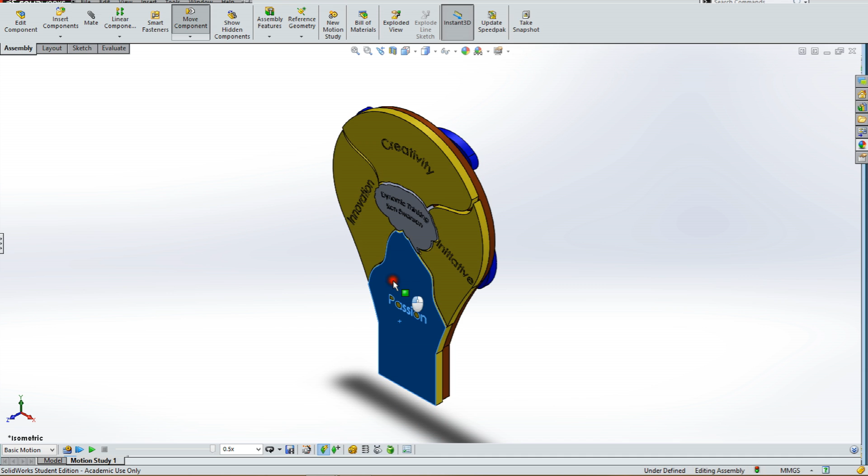But I had never seen anything done like this before, and I didn't even research it. For them all to come out from the center and move back into the center at the same time, it would require a different kind of mechanism.

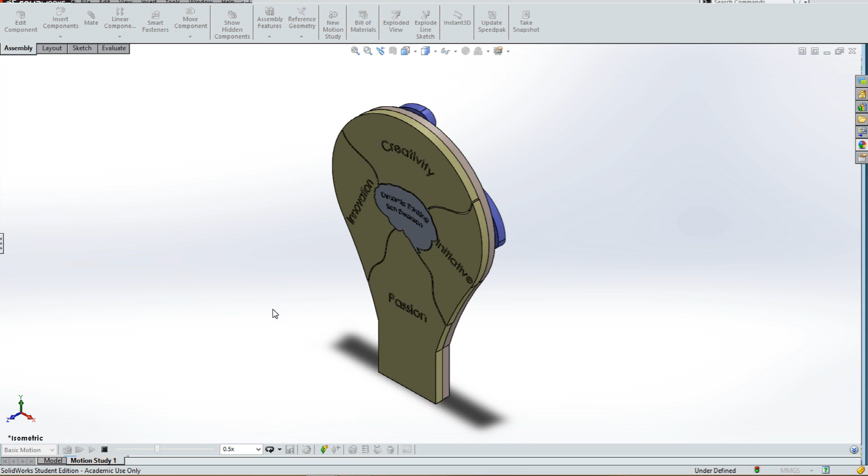So this is the effect that I achieved in the end, and it was because of this cam here at the back. It's a cam that works in two ways. Usually we have cams that work in one way, where they just push out like it is doing here. This one also pulls it back in, so it pushes out with this side here, and then it pulls it back in with this side.

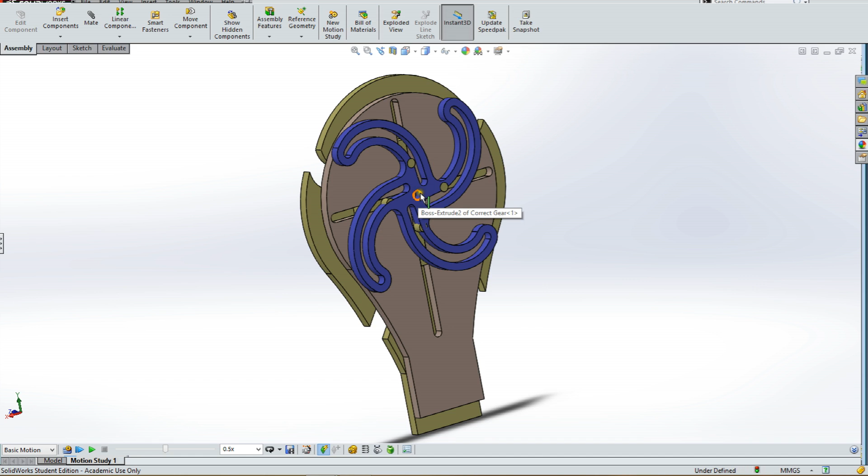Obviously the cam has to be able to rotate in both ways, so I'll have to use a genie board to make the motor rotate clockwise and then anti-clockwise to both push out and pull back in the cam.

I made it the very same way you can make any other cam. I just simply made out a displacement diagram like this here.

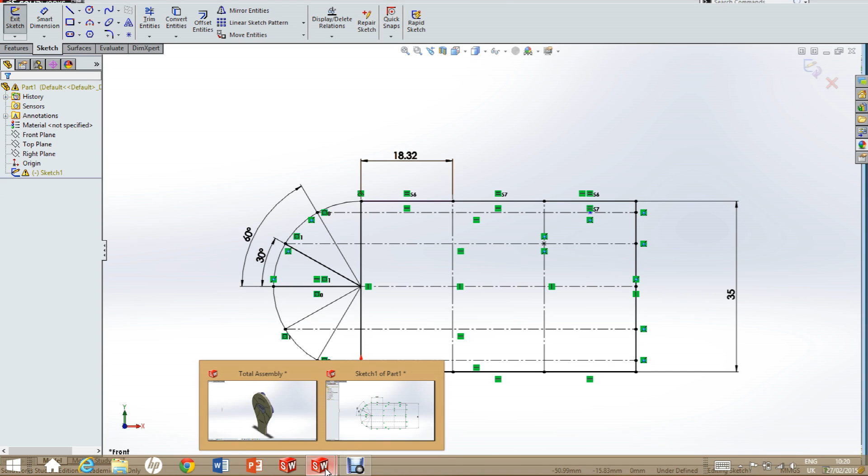The reason I have only 3 sections is because I'm only using 1/4 of the cam, I'm only designing 1/4 of it. All these, each part here is exactly the same, and they all represent 90 degrees of rotation. That's 1/4 of the cam taken up by each part.

So I don't need to do a displacement diagram out for each one. The same measurements are going to apply every 90 degrees, so it just saves time and effort.

So what I did was I calculated the amount that I wanted to displace these pieces, whatever amount I wanted these to come out and then back in.

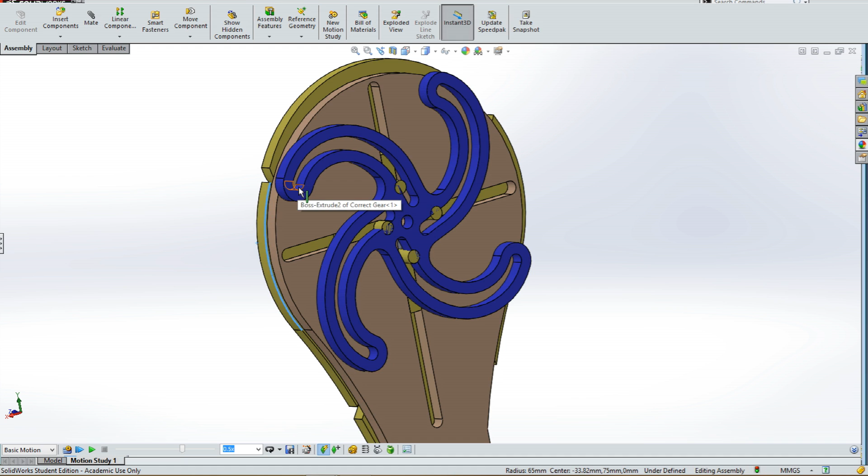And that's also equal to the distance from the center of this to the center out here. That's the displacement of the cam, how much it can push out the follower, which is these cylindrical pieces here that are attached to my front face pieces. How much it can displace them, push them out, and how much it can bring them back in.

That's going to be the height of my displacement diagram, not the distance from the center out here or the center to here. It's going to be the amount that I want to displace it, because that's the part of the cam that I'm designing. I'm not designing in here.

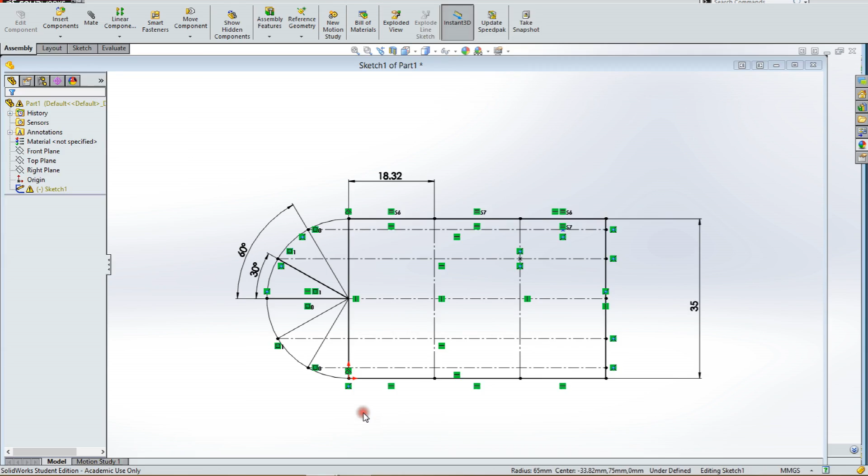So what I want to design is from here out to here. So what I did was I made a displacement diagram. This displacement diagram obviously represents 90 degrees, as I said, and I'm going to use simple harmonic motion, so you have to get your circle divided up into 6.

And then you're also going to have to divide whatever amount you want up into 6 as well, to get the points for your spline.

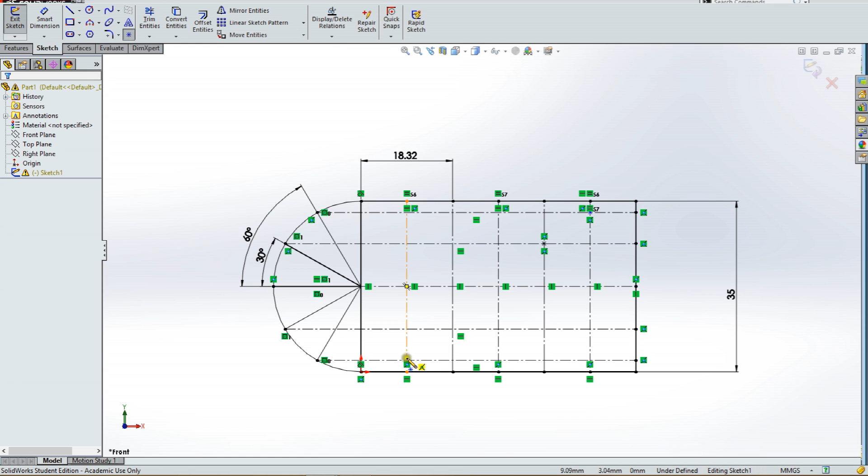Now, so all those are fully defined, which is important. Now I'm going to put a point on each intersection of the lines here. There's already one there, and there's already one almost up there. So I'll just fully define them as well.

This is so the spline can have defined points in which to pass through, or else it won't be defined in the end. Okay, so now I draw the spline.

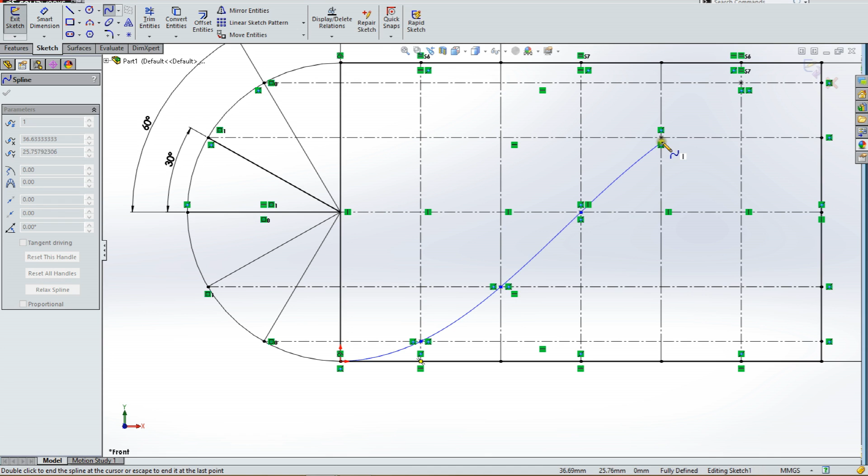It's the same as any other displacement diagram that you might do when you're even on a drawing sheet. It's just that we want to get accurate measurements for our cam. You could even do it on a drawing sheet and then get the measurements, this is just a lot simpler and a lot more accurate. You're sure it's going to be right.

Okay, so that's our spline there, that's our displacement diagram. If you were to do it again and again and again, it'd just be the same, so that's why I just concentrate on the one section.

Each of these lines, every second line here that I showed at the start, is 30 degrees. So that's 30, 60 and 90, which is a quarter of the cam that I want to design.

Now the next part is going to make the sketch go a bit mad, but I don't want to get any resultant part from it, so it doesn't matter. What I want to get from this is the measurements, at which this point here is far away from the inner point. So this line here represents...

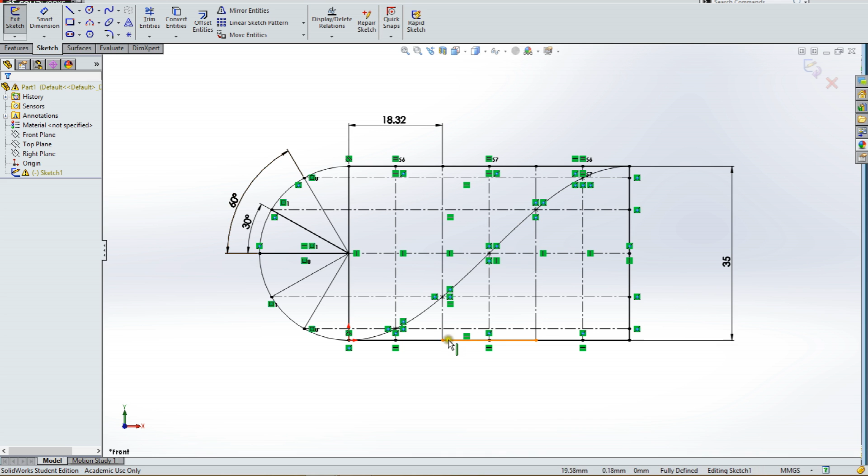...the center of this here, and the top line in my displacement diagram represents this, because that's the maximum diameter, or the maximum radius, and this is the minimum radius. What I want is the displacement, 35, so that's what I did here. I did the maximum radius, take the minimum radius, and that's it there.

So what I want are the measurements from the minimum radius. That's 2.34. As I said, the sketch is going to go a bit mad, but it doesn't matter because I just want to get the actual measurements from these points that the spline passes through.

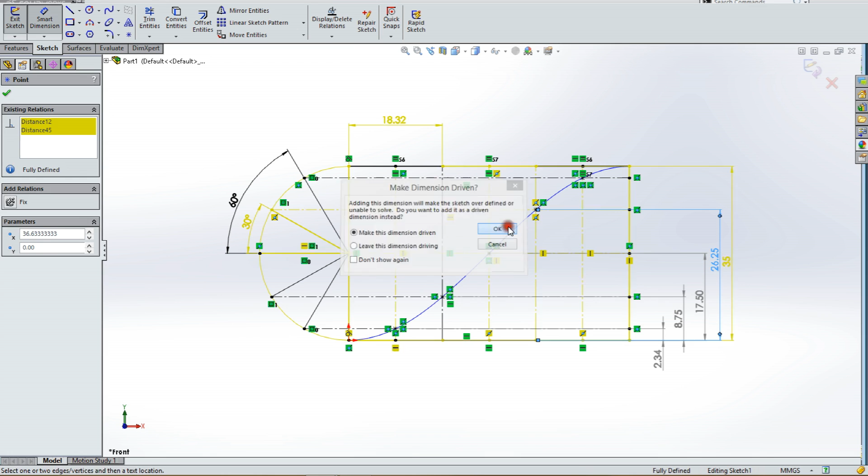If these lines, every second line here, represent 30 degrees, 60, then 90, these must represent 15, 45 and 75. So that's what I'm going to make in my next part.

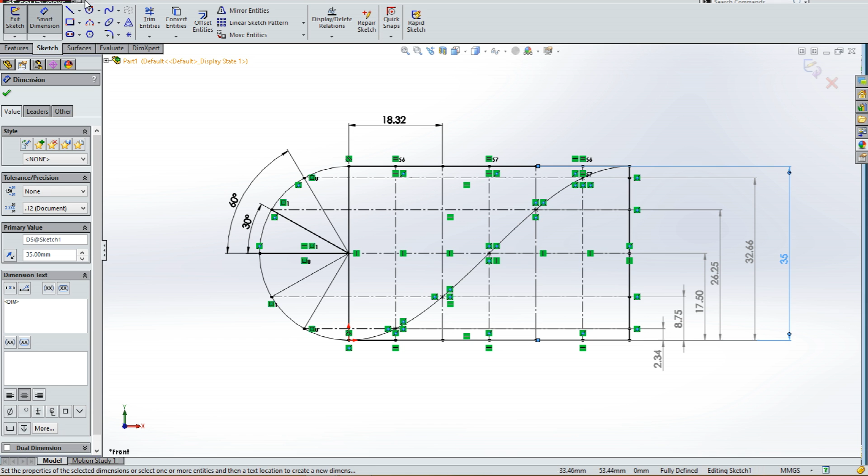I'll just make a part now of how to make the actual cam, given that we've found out the dimensions.

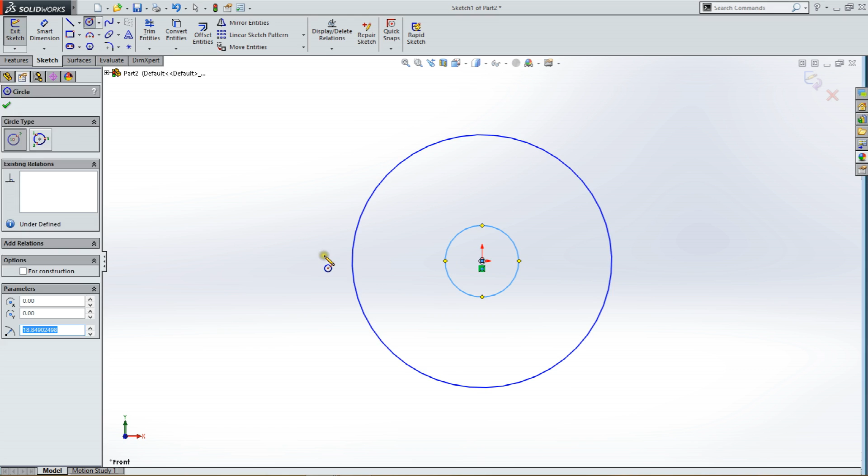Okay, so we'll sketch on our front plane there. We'll sketch two circles. Now we'll put a point here and there. I'll make this 35, so that's going to be the displacement diagram basically.

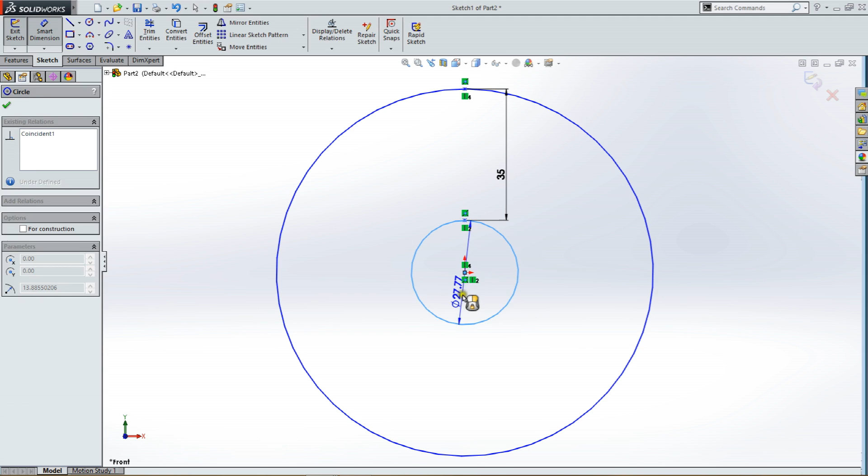Now I want the center of the cam to be, say, diameter 20, just for a bit of strength. So that's fully defined now.

So that's diameter 20. Now I want to split up a quarter of my cam into 0 degrees, 15 degrees, 30 degrees, 45 and so on. So I'll just draw these lines here.

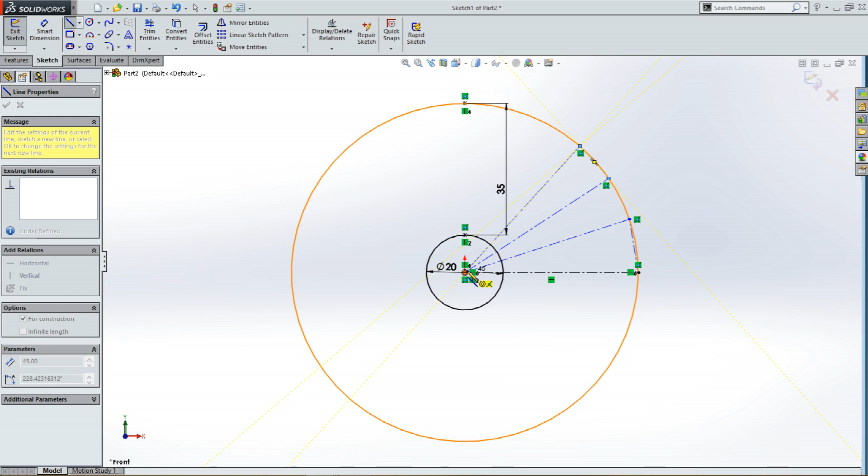30, 45, 60, 75 and then 90. Okay, delete these little ones in between.

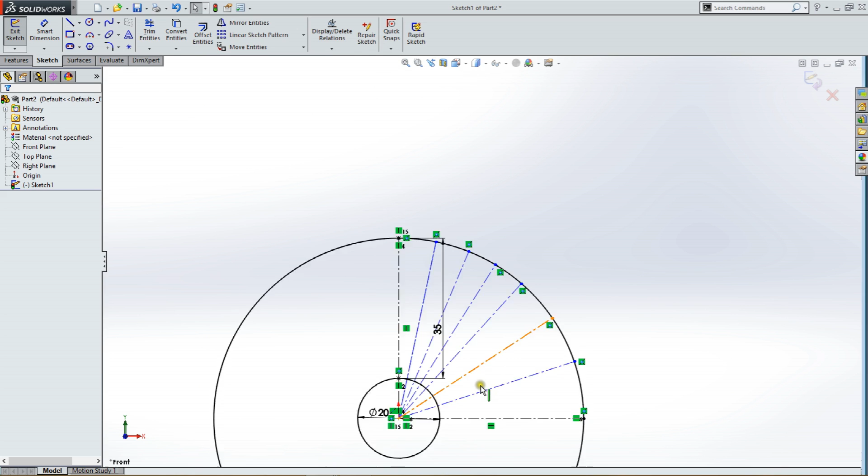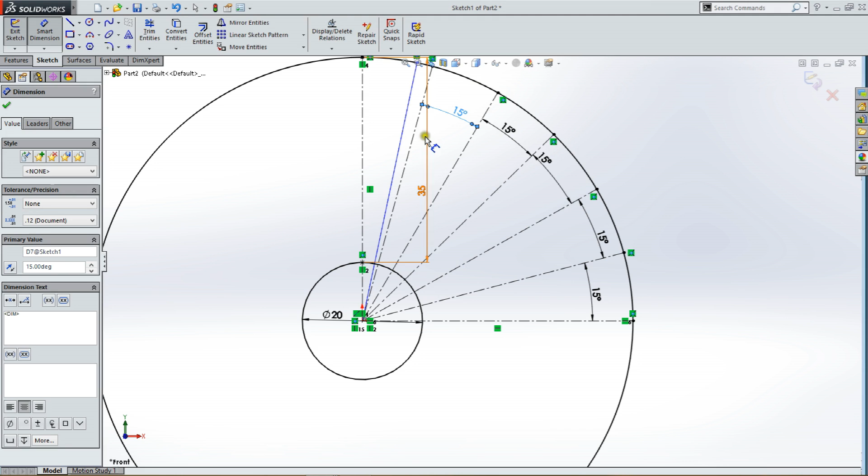Okay, now we'll just put the angles on them. So 15, 15... okay, so I already had that. Okay.

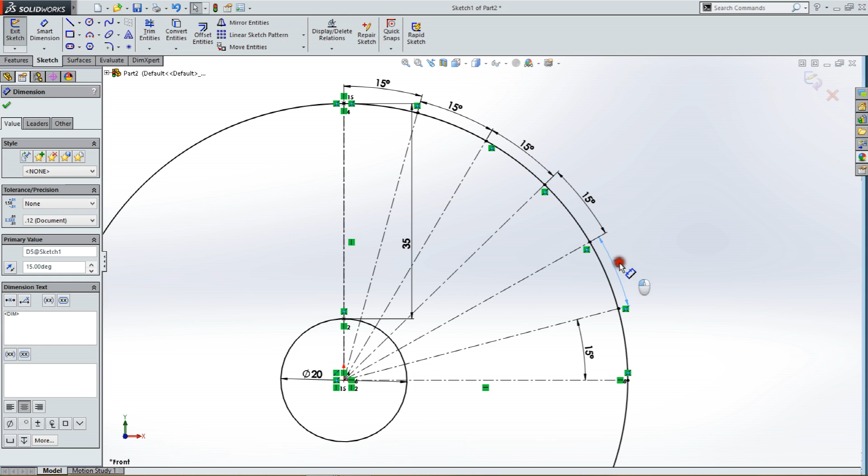So there are different sectors that we're going to put our points on for this curve that we're going to draw. And how we get our distances to go out on each one of these lines here is back to our displacement diagram.

A good way of flicking through tabs in SolidWorks is Control, Shift and Tab. It goes to the previous one that you were just on, so it'll be very, very simple for this when you're trying to get measurements.

Alright, so this is 2.34. I'll just put on points here, because I don't want it to be from the center, I want it to be from the minimum radius, because this is 35. So this section here actually represents our displacement diagram.

So I'll put points on each place these intersect, so I'll be able to then dimension away from those points.

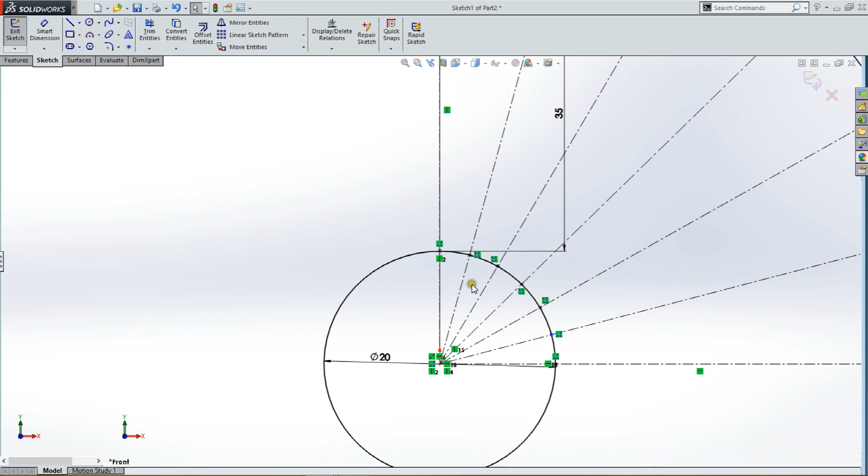Now 2.34 is our first point. So our point here is 2.34. But our first point really is here, sorry, so it's 0. So that's our first point. That's at 0 degrees, so that's 0 height.

Our second point is here, and this is at 15 degrees. So that's our second height, and that's 2.34. So I'm just going to draw that point there, smart dimension it. 2.34, and that's done.

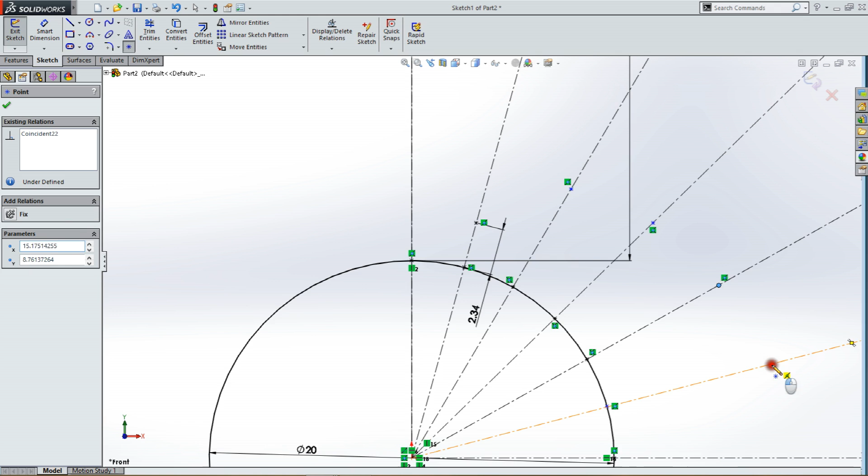Next point is going to be 8.75. So I'll put the point on the line. Might as well put it on all lines as well, just so I can smart dimension it, then that's all I need to do. So 8.75 for a second point.

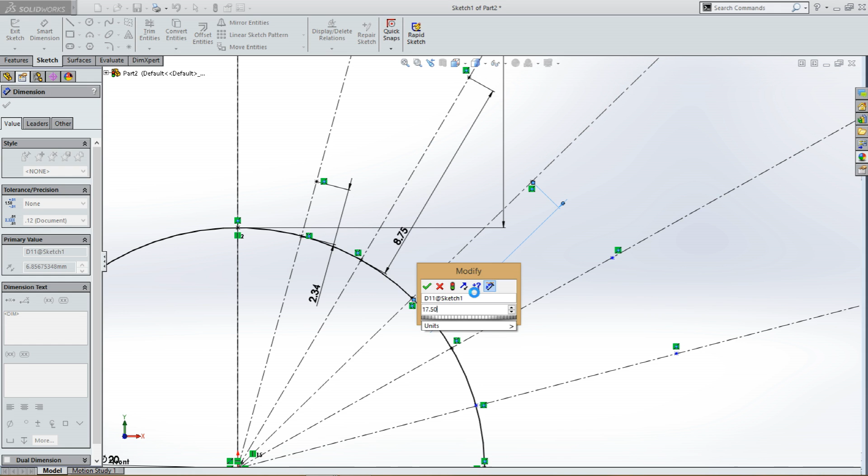Third point is 17.50. Fourth and fifth, 26.25 and 32.66.

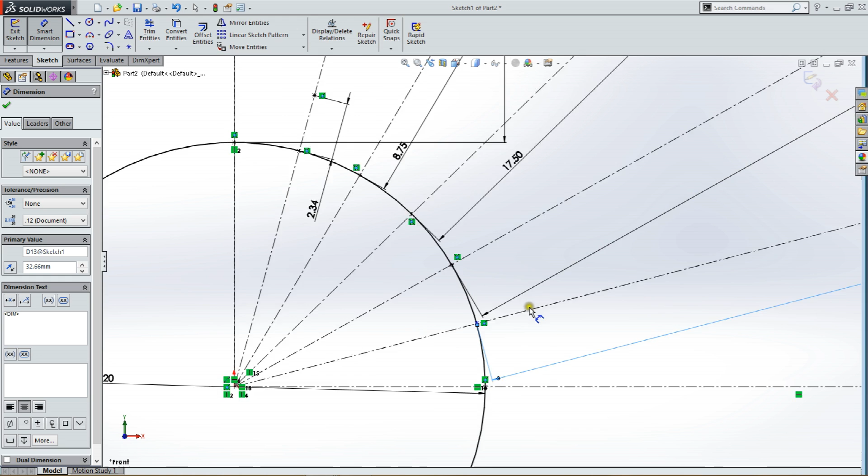Also very important that the dimension lines coming from the arrow to the line are 90 degrees to that, like I was doing here. I'll just do it again. I was able to get a dimension here, but that wouldn't be right, it's not the radius. We're calculating how far it is out on the radius line from the diameter or circumference of this circle. So that's how you do it.

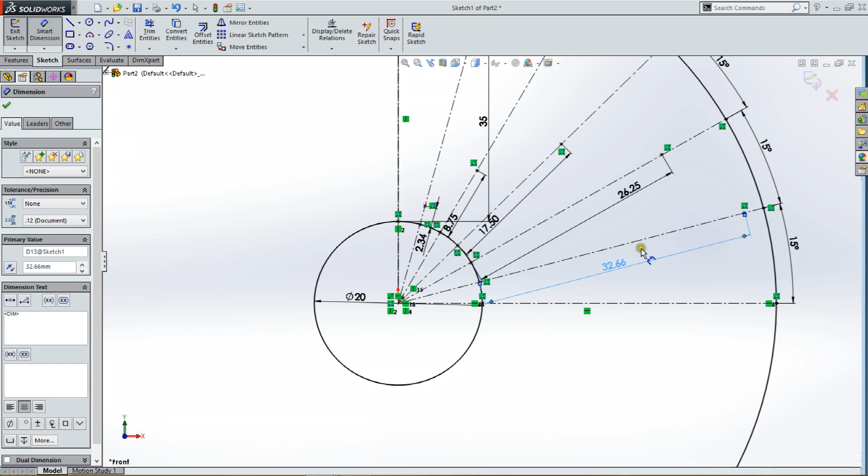Okay, now all these points are defined. Should be alright. Good to make sure that these are all at the points of intersection as well. So if they just don't go first time, just make it coincident to the radius line.

And then you have a fully defined sketch. Now what we need to do is draw our spline. We have all those points defined. All these points have to be defined in order to ensure that you have the correct spline. So our first point is at 0 degrees and it's 0 height, and then this point - this part is very simple.

Okay, now we have a fully defined spline, and that's simple harmonic motion, which is what we use as well there.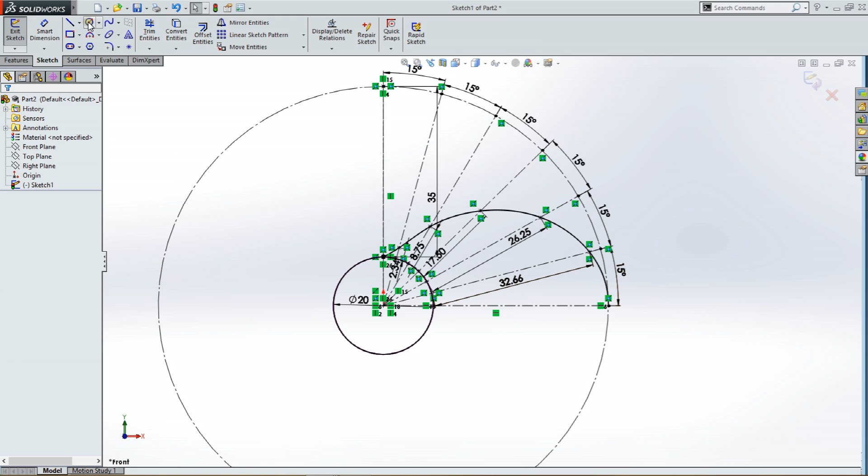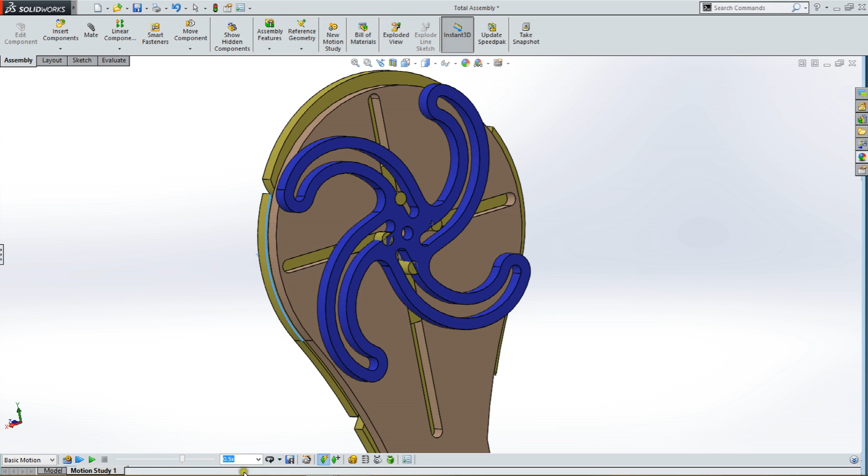Now what I want to do is just draw another circle outside of this, which is going to be the outer circle on this here. This will be the edge of it here. So what we've drawn is the center of these. So I want to draw the outer circle now for something to house it in - something that can be cut out of.

Right, so this circle here, say we could make it around 50, so 100 diameter. Okay, now what we need to do is make a slot out of this curve.

So what you want to do is offset entities, select that entity, and then create. I'm going to do 3, because that's the general size - it's going to be 3 either side, so that'll be 6 mil. So let's do 3 that way. And then again offset entities, and then 3 that way.

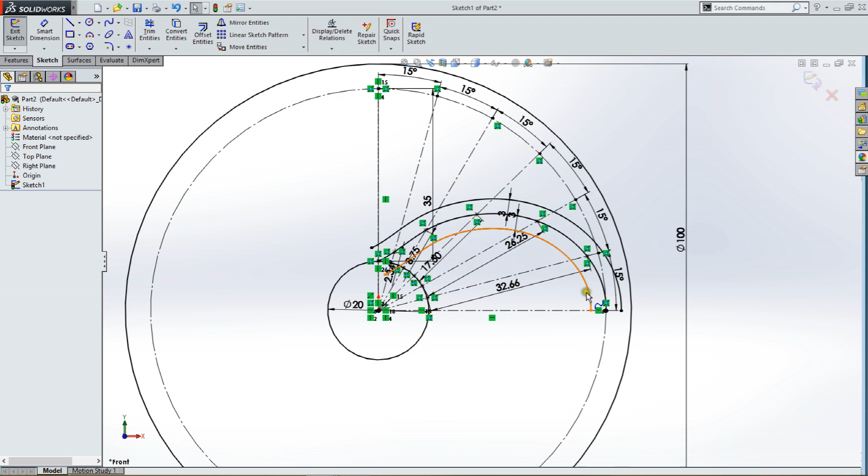Okay, that's done. Now what I want to do is create something for the follower to finish in, so it's going to have to be a circular profile on either end - there and there. Make it tangential to this. Make this tangential as well. Now we have that fully defined.

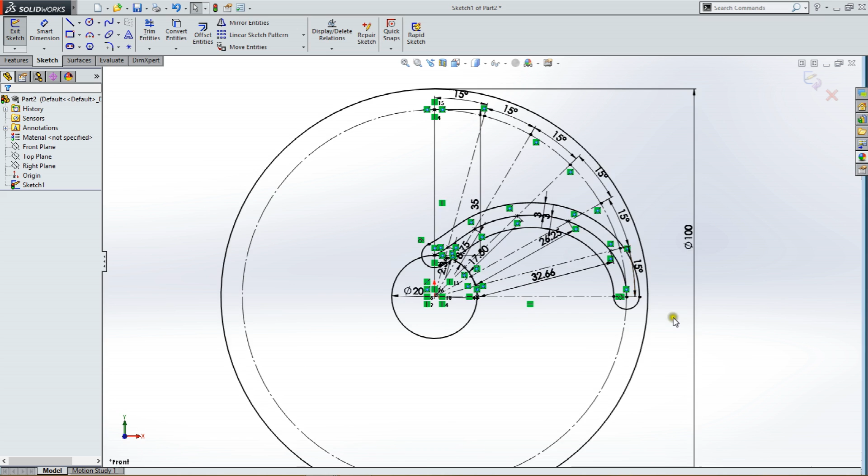Now what I want to do is replicate the slot that I've just created. As I said before, it's 90 degrees, it's going to be the very same as you go around. So what I want to do first of all is copy entities.

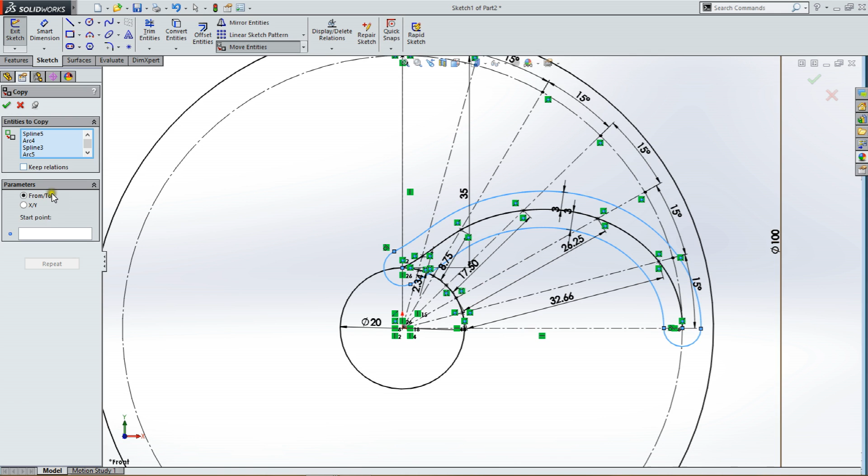I'm going to copy the outer profile of that slot, and then start from a point right here in the circle, so it's going to be starting every 90 degrees. So all you have to do is have it there, here, and here.

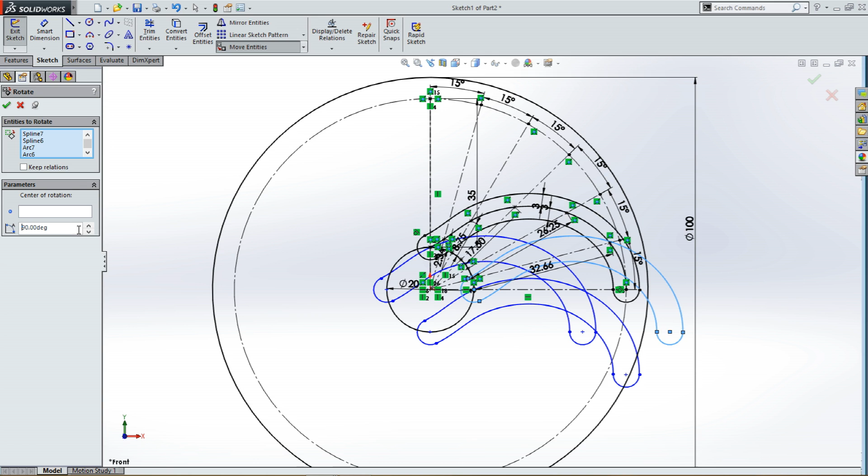Okay, now what I want to do is rotate entities. So I want to rotate this slot here, which is my first one, 90 degrees, I think. Center of rotation is also used as well, sorry. So, 90 degrees, we'll try that.

Okay, so it's - oh, I see. Okay, so it'll be 270 degrees, doing it like any other circle, where 0 degrees is here, there's 90 degrees, there's 180, and here's 270. Forgot about that. Okay, here is our next point that we want to rotate.

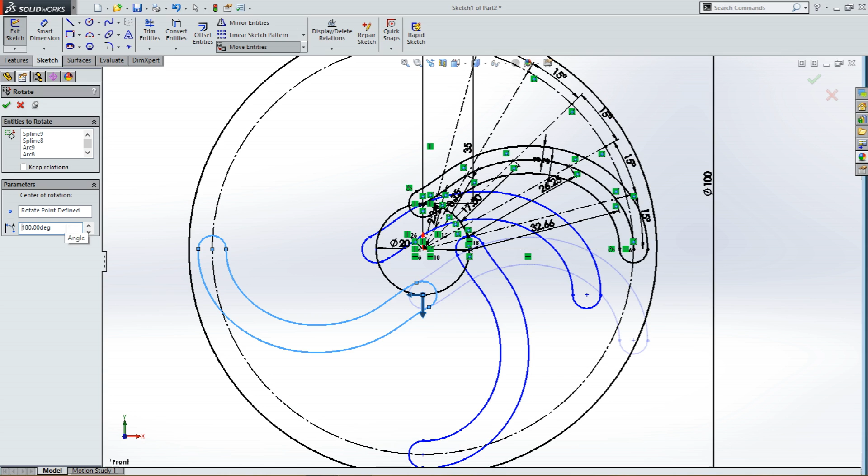This is our next slot that we want to rotate. Now this one will be going to 180 degrees. Okay, and you know it's right because this center here is on this line here. So we know that that's right.

Okay, now rotate entities again, rotate our last slot. Center of rotation again is just going to be at this point here, and this time we're going to go 90 degrees, and that's all of them rotated.

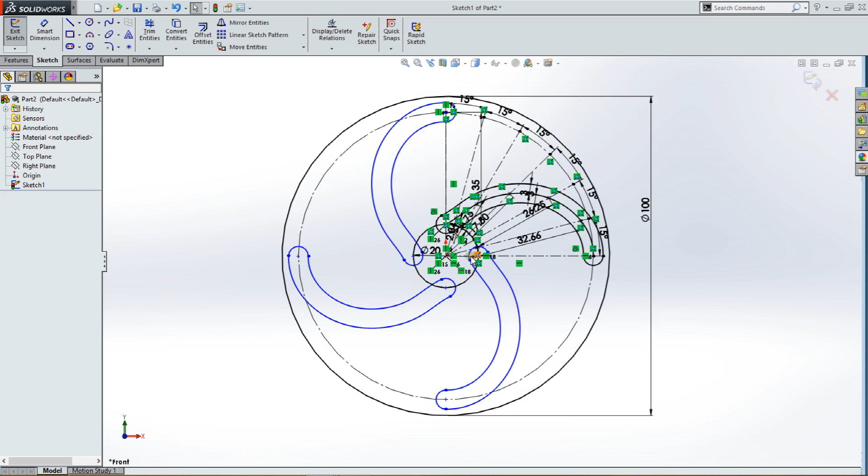Okay, now as you can see here, it's not fully defined. They're able to move around, and that's not what we want. So what we want to do is fix their points.

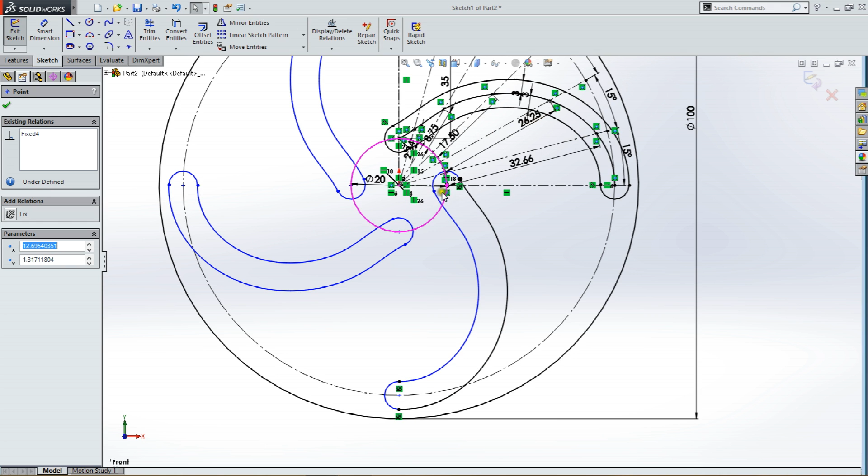Make them fixed. Also, want to create the same as before, make these tangential to here. When you copy and rotate them, don't copy the relations as well. Maybe there's a better way of doing that, but this is how I'm doing it.

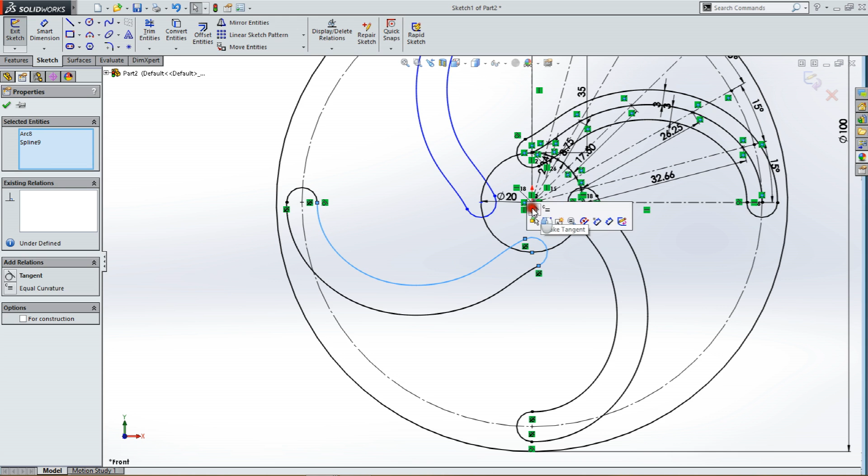Okay, make them fixed. Then we make these tangential, same as before. I'm sure there is a better way of doing this, but I haven't found out yet. It gets the right result anyway.

Okay, these are the 4 points that I want to make fixed. Again and again, just make tangential.

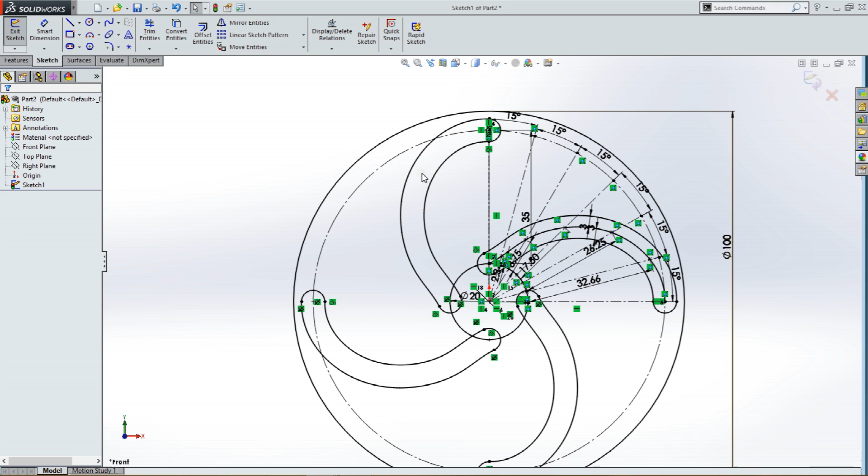So what I want as well is this will be my profile here that I'm going to cut out. So I also want to show this will be a slot in the piece. What you can do is extrude it now and select these contours here. And you get this piece.

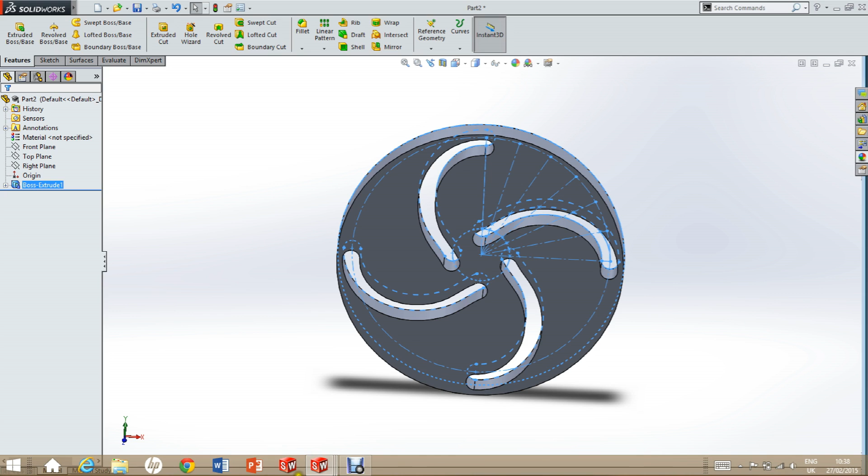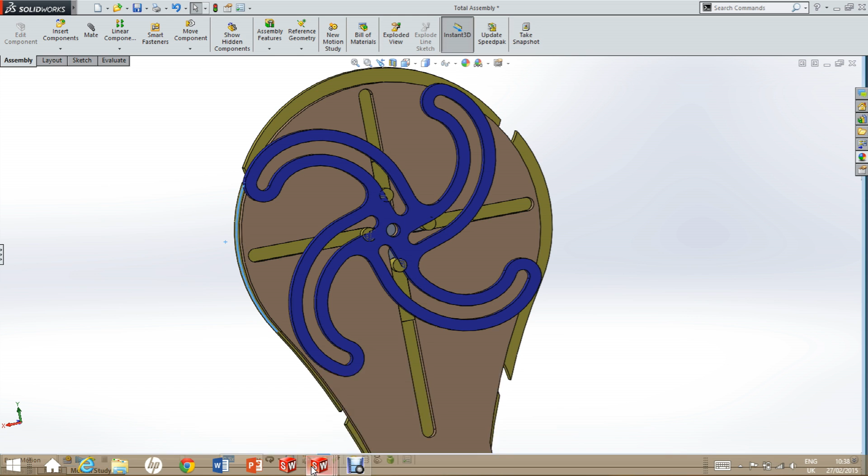It'll work the very same way as the cam that I've shown here. That's the very same as that cam. It's just that in this cam I've not only saved material, but I've reduced the weight that it's going to take to rotate. Reduced the weight of the cam, so it'll be easier to rotate for the motor, and it'll look nicer as well, a lot more fluid. So if you want to go and do that now, it's okay, but I'm going to go through how to make this profile here now.

Now, to create that profile that I was talking about, I want to first of all delete this outer circle, because that was just to extrude the cam as a complete solid object, as a circle with just slots taken out of it.

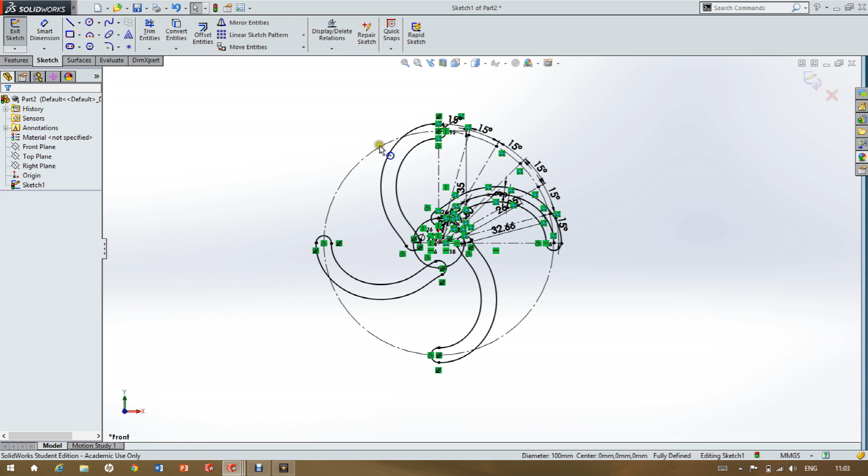But now what I want to do is have slots taken out of it, but those slots define the outer profile of it. So first of all delete that circle obviously, but then I want to offset those slots, the outer edges of those slots. What I want to do is have an offset of 5mm from here to here. So that means I have to have 8mm from the center here.

I don't know why it doesn't offset this 5mm. So I need to have an offset of 8mm from the center out to this line. And I'm going to have to do that on the other side as well.

So offset into these, the side you want it to go, and that's it there. And offset into these. Since the semicircle is actually on the slot, you're going to have to do that to 5.

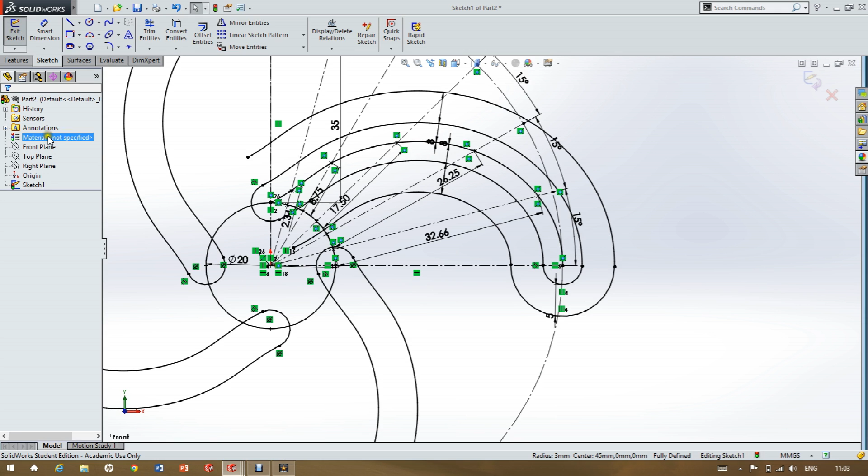And that's done, and they all fully define themselves. Now, slot, these are all to 5 now. Offset into these, 5. And then offset into these again, 5.

So what we don't need here is these semicircles at the very center of it, because that's not the profile we want. We're not going to be offsetting that and cutting out these as well. We just want the outer edge, so we can delete them and keep the semicircles of the slots themselves.

Okay, now what I did to complete the outer profile was just draw a semicircle. It's tangential to both of these sides, so it's tangential there to this spline, same as before, and it's tangential to this spline as well, and that's fully defined, so it's okay.

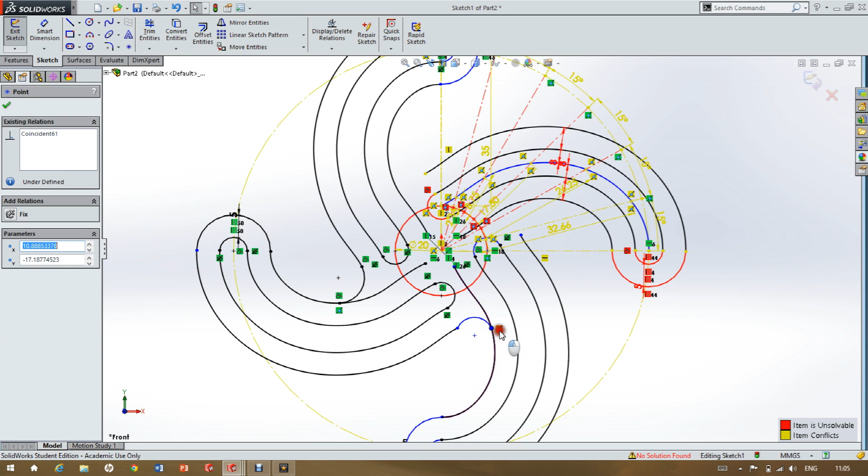Offset another semicircle then, tangent to that spline—no, I selected something by accident there. Alright, so the semicircle tangent. Let's stop me from doing that. Okay, don't know what happened there, but it should be able to work alright.

Now the semicircle tangent to this curve, and also tangential to this curve, and then the semicircle again, tangential to this curve first, and then tangential to this curve, and that will be fully defined again. So what we need is to just get it fully defined. So tangential again.

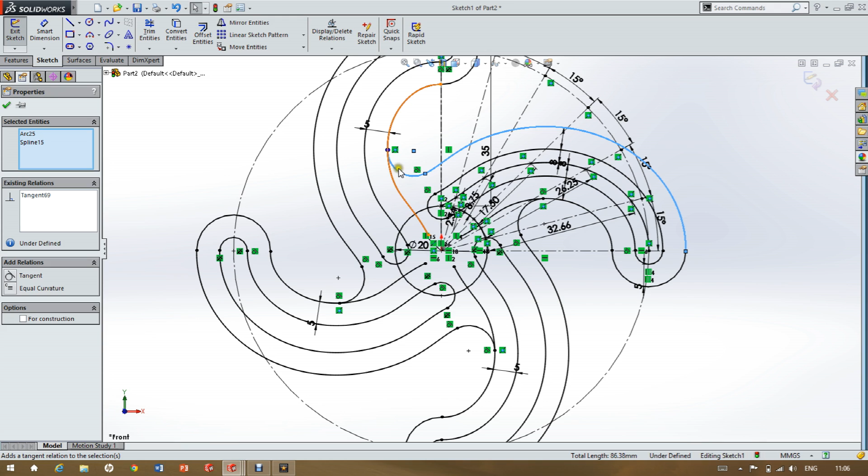Okay, now we have our profile, and what I like to do as well is just draw in the slot, the hole that the shaft is going to be going in through, so that's going to be 6mm in diameter. Okay, now that's finished.

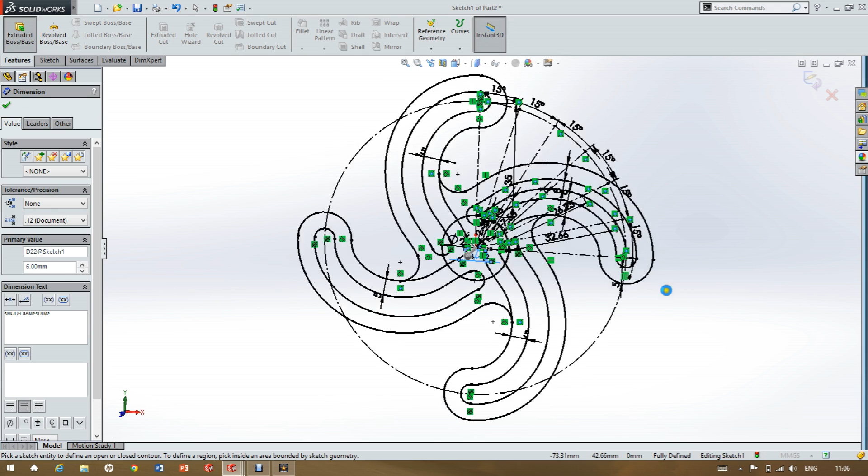What we need to do is select our contours. There'll be quite a few of them. Here, inside here as well, and that's all. You set your depth, so I'm going to be using 6mm Perspex acrylic, so here's going to be my finished cam.